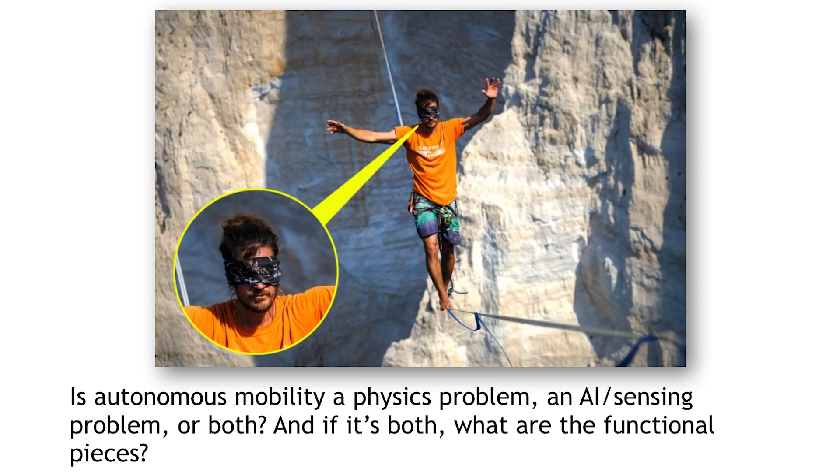Because of the complexity of the environment, if you're doing inverse kinematic style design, you have to have very complete world knowledge in order to do successful controls on the machine. If you think about this system, though, this gentleman has wisely decided it would be good to blindfold himself before slacklining across this canyon, and has taken the interesting step of removing sensing from the equation other than proprioception. So clearly, you can do very complex locomotion tasks like this without having a perfect map of the world, because you can blindfold yourself and intentionally delete the information. So that kind of asks the question, are high-level cognition and mobility separate problems?

And as any good talk has, there's no actual answer here, but I want to talk through some of the issues. You can imagine on the left-hand case that there is a robotic design approach that's a bit like this problem, where you have a really good mobility platform and you graft a really smart AI on top of it. And to some extent, they're separable. So the horse can operate by itself, but without an understanding of high-level intent. Certainly the AI in this case can think things by itself without having the mobility platform to execute them.

On the other hand, if you have a world-class athlete like Edwin Moses, who won a number of track and field meets back in the early 80s, back to back to back, that's not really a separate problem. So you can't imagine a case where an Olympic-class hurdler is really able to remove the cognition and planning from the mobility of the manipulation side. And there obviously is a spectrum here. So you can have machines that are more on the pick-and-place end that have very little in the way of active AI, or systems that are purely AI-based.

Our interest in this, and this is Pittsburgh. Pittsburgh has some of the same problems that Boston does, but with hills. So if you have aging infrastructure, or the very cleverly designed ADA-compliant front stoop here, this was actually co-founder Jonathan Hurst's house in Pittsburgh. If you imagine trying to have a robot that can move through the human world, it unfortunately contains things like this. It's hard to argue this was even really designed for people, much less for machines. But there's lots of things out there like this.

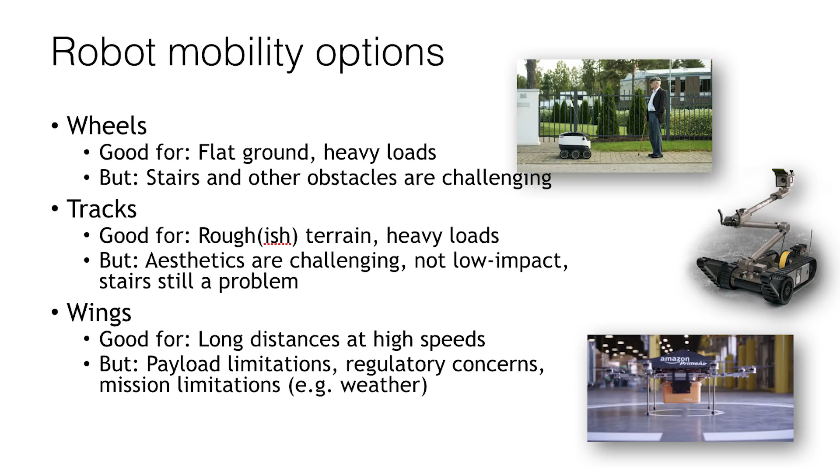So with wheels, stairs and obstacles are challenging. Tracks have a very military aesthetic in addition to some mobility issues. And then for wings, in Southern California, it might be possible to use those most of the year, but certainly not anywhere in the Northeast if you're taking into consideration weather. In terms of legs, legs in general are very good for human environments. As a consequence of us having legs as much as anything else, I'm sure if we had evolved with wheels, our environments would be good for wheels too.

So people have asked us, well, why bipeds? And the answer is, well, there's obviously a spectrum here too of the number of legs that you can have. So RHex, which is a fairly well-known early legged machine, had 6 legs, had the nice feature of being statically stable.

All things being equal, and they're obviously not here because the SCHAFT robot at the bottom and RHex have very different styles of legs, but all things being equal, if you have legs of sort of equivalent complexity, more limbs means more actuators, which means more cost. 2 legs in particular are good for human scale tasks in human environments. And that's as much a form factor thing as it is anything else.

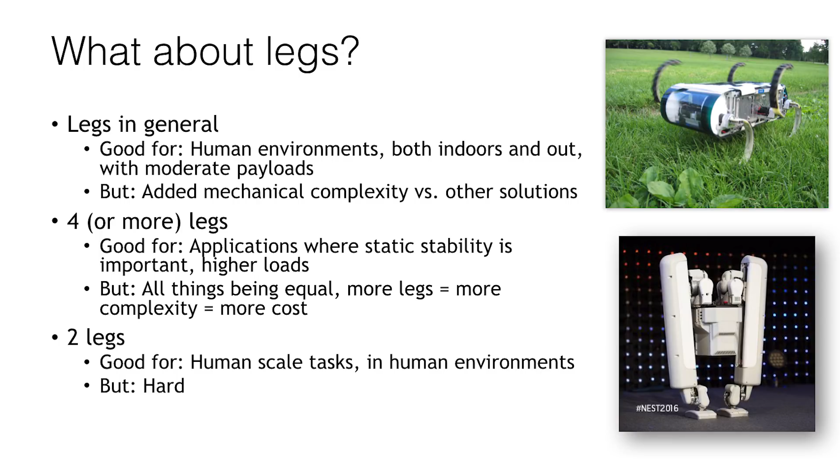I have a dog. Robots like Spot Mini have amazing mobility, just like dogs have amazing mobility. There are probably lots of applications where that's a reasonable choice. Where it starts to fall apart a little bit is in a paradigm where you're interacting with people. So if you imagine a package delivery task at a business where the expectation is the package ends up on the counter, you end up having to add additional manipulators onto the back of it, so the arm that Spot Mini has on it, for instance, in order to reach the counter, whereas with a biped form factor, you end up with the manipulators at approximately hip height for a human.

Now, the problem here is this is hard. So bipeds have been sort of what people have imagined the quintessential mobile robots being, going back to the 1930s with the Westinghouse robots. But there are some significant challenges here. This was actually the first robot that Jonathan ever built, on the left. This was an unnamed CMU biped from the 90s, back when he was an undergrad. And this has been sort of a traditionalist approach to making humanoids that actually is continued in commercial products today. So I'm not trying to point fingers and say, look, this is a terrible way of doing it.

The idea that you would directly actuate each joint in the robot is kind of an intuitively relevant approach. So the idea here is if you look at people, you can identify all the degrees of freedom on someone's arm, all on the leg, put motors in each spot, and then control it. If you had a magic actuator, that would work fine. The problem when you start to address the physics of this is that as you place mass distally, either on your arms or your legs, you end up with these big pieces of inertia that are out there waving around along with the limbs. And if you're trying to do low-cost educational robotics that's not particularly dynamic and is instead trying to give you active control over all of the degrees of freedom of the robot, from a control standpoint, fully actuated as opposed to under-actuated or over-actuated, then that's an appropriate choice.

The problem is, as you start to get up into dynamics, it would be a lot like having the car engine out there spinning around with the wheel of your car. It's a huge waste of inertia. You have to accelerate it and decelerate it as you do the movement. So there was some work that was done with someone who ended up actually being a collaborator of Jonathan's at one point. So this was Hartmut Geyer's work at CMU.

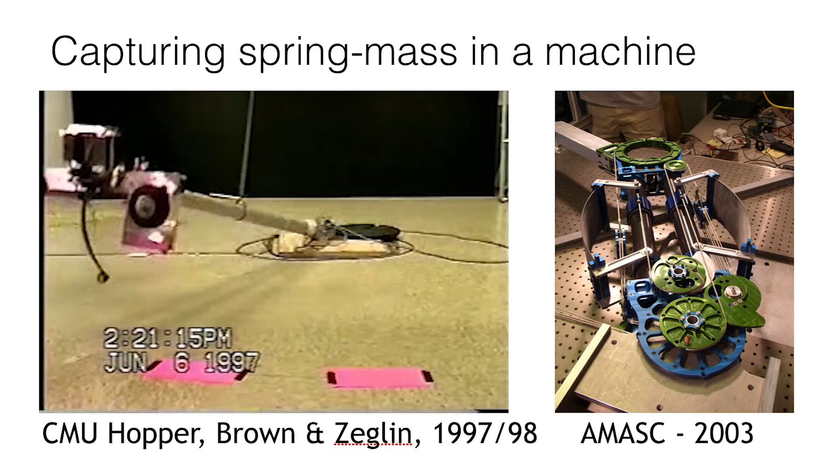So lots of people over the years have tried to capture spring mass motion in a machine. So this was work that Ben Brown and Garth Zeglin did at Carnegie Mellon in the 90s. The work that Ben Brown and Garth Zeglin did was the CMU bow leg hopper. Videos of that are available on YouTube.

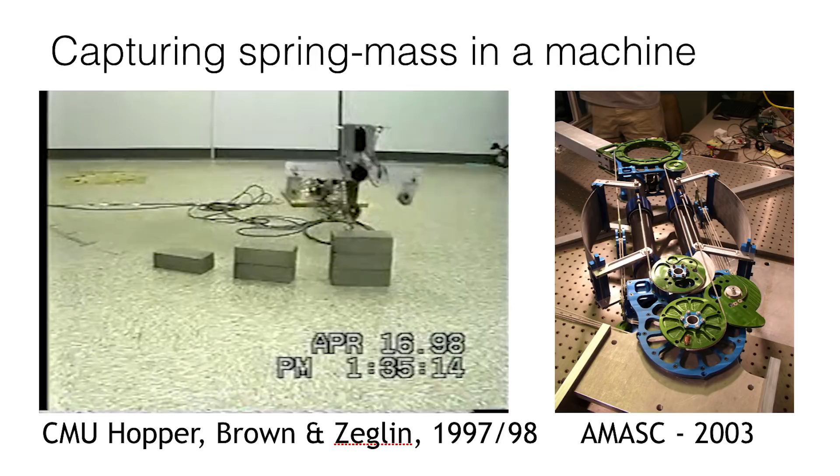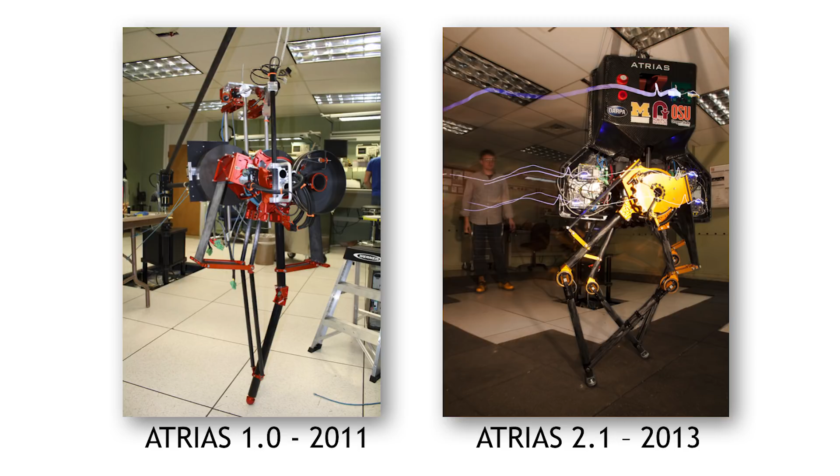That evolved into ATRIAS 1.0, and this was work that was done at Oregon State University. That was up to ATRIAS 2.1 by 2013. There were 3 copies of this, one at Oregon State, one at University of Michigan, and one at Carnegie Mellon. So that was Jesse Grizzle at University of Michigan and Hartmut Geyer at CMU.

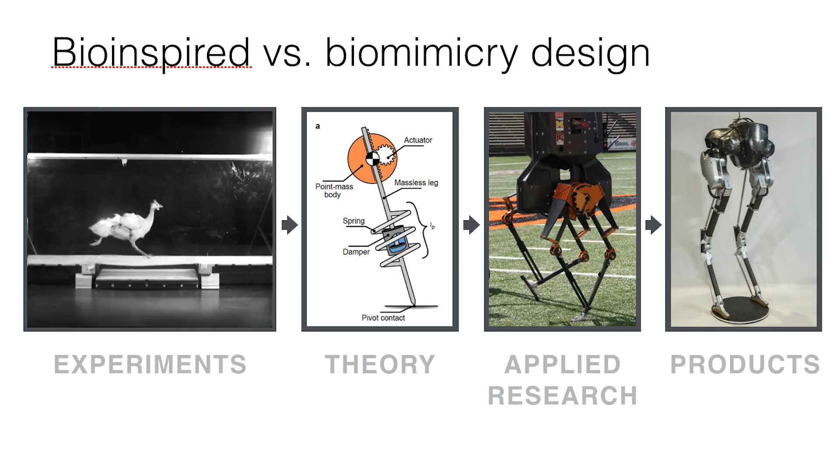Now, this gets into the topic that I alluded to, which is, are we intentionally trying to make machines that look like the animals? In this case, no. So the starting point here is, of course, animal experiments, because that's our best reference for bipedal locomotion. That goes into a math model, which turns into an engineering project, in this case, the ATRIAS project, and then is turned further into a commercial product, which is Cassie.

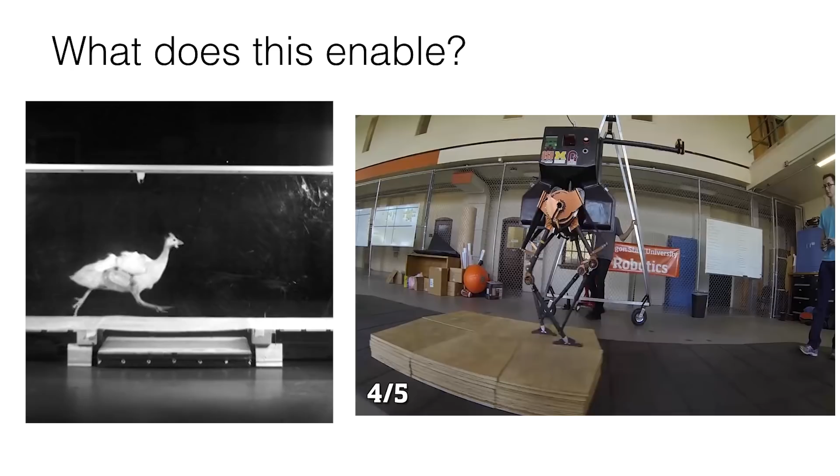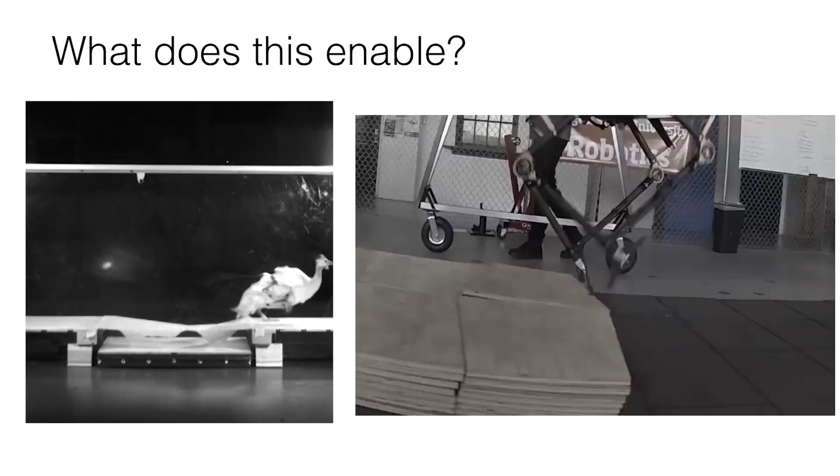So this enables a couple of things. If you compare these two videos side by side, the bird on the left-hand side has no idea that it's running down a runway and is about to hit a piece of tissue paper. So it was trained to run down a runway while being chased by a grad student. And what it's doing here is punching through the tissue paper.

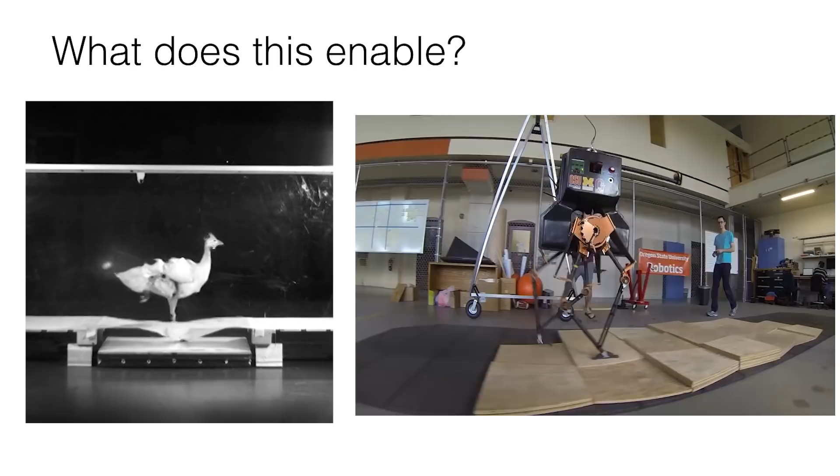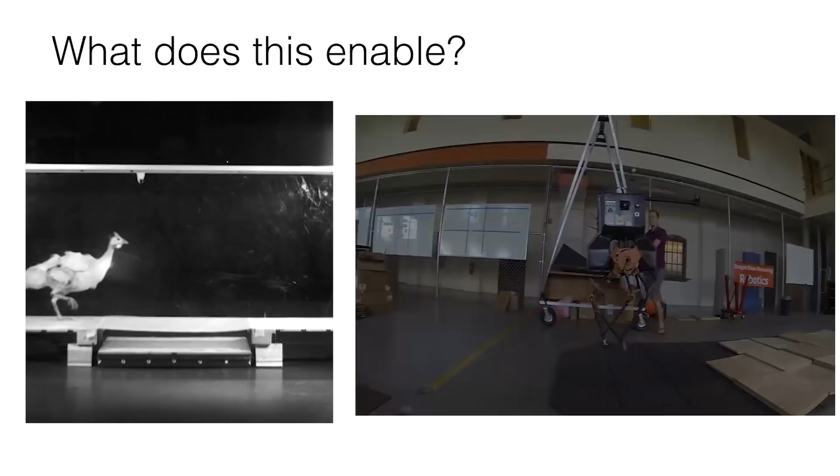And if you actually look at the neural response time in biology, there is no active control that's fast enough to catch that leg behavior. So what's going on here is primarily a physics problem that's kind of baked into the hardware of the robot on the right-hand side, or the bird on the left-hand side. And ATRIAS exhibited very similar behavior.

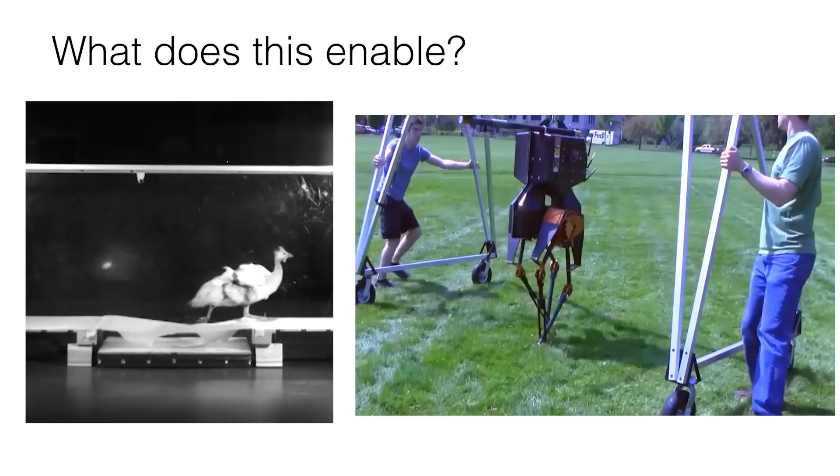So the version of ATRIAS here had no sensing on it at all. So it was unaware that it was walking, in this case, outside or on those steps, and was able to sort of stumble and recover based on the physics of the gait, as opposed to 3D scanning the environment, having a plan of where it was going to place its feet, and so on.

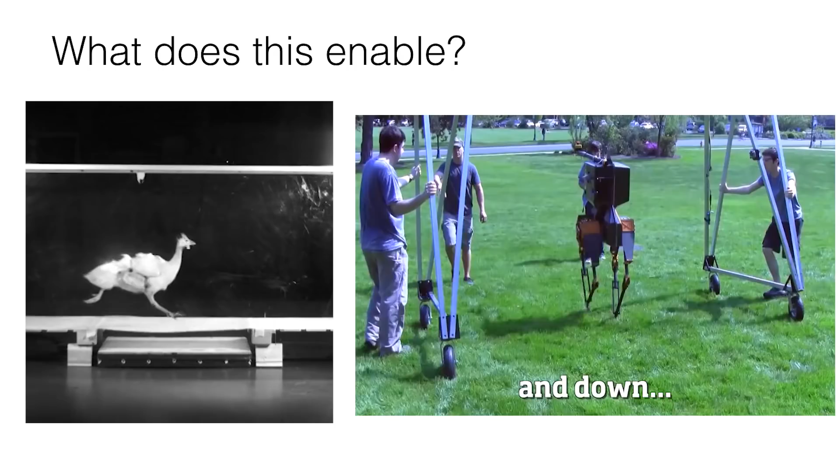And so that suggests that, qualitatively, because we can see similar behavior here between the bird and the robot, that maybe we're heading in the right track in terms of what portion of this is software defined and which portion of this is mechanically defined.

The problem here, though, if you think about this from a product standpoint, which is, of course, what we're interested in as a company, ATRIAS was pretty far from our product. So it had no ability to get up after a fall and would frequently tear itself to pieces when it fell sideways. So it had the actuators that came out the side, very heavy upper torso, took a lot of engineering work just to keep the machine alive, much less have it be a useful product.

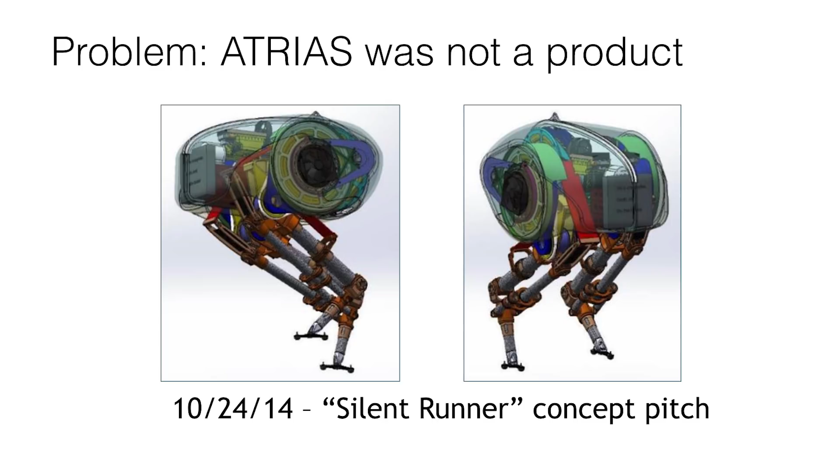So in 2014, this is sort of where I first got involved in the early stages of what became Agility. The university proposed a design concept for DARPA that they were calling at the time Silent Runner, and this is what evolved into Cassie in about a year and a half after the beginning of this project. So we got involved as a company formally in 2015. I spent the first year of the existence of the company working out the license agreement with the university.

We took an interesting approach with our seed investment, which was to negotiate a lot of it in 2015. But because it would have just spent money on legal fees and not building robots, we chose to defer all of that until November of 2016. So we moved at a pretty quick tempo after that point. The first robot sale was to the University of Michigan in 2016, started shipping them the following summer. And then closed our Series A here just a couple months ago with Playground Global as the lead.

We currently have a total of 14 employees. We have another 3 of them starting in the next 5 weeks. 12 of those are at the main office in Oregon, and then we're also opening an office in Pittsburgh in about a week and a half. We just signed a lease on that. Sort of conceptually, the split is that business development and software is in the Pittsburgh office, and electronics and mechanical stuff and robot construction is in the Oregon office.

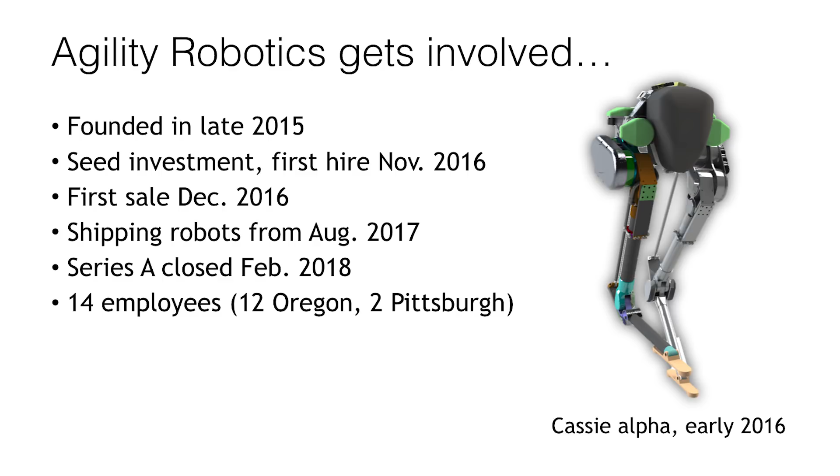I'm not going to talk a whole lot about our pitch, because that's not the point of this talk, other than to observe that platforms are products in and of themselves. So we are not, for instance, getting into package delivery by ourselves. We're saying that you can have a mobility platform that, when you add features and add infrastructure to it, becomes a delivery service. Or in the case of an automobile platform, you can take the same underlying technological platform and also have it be vehicle transport.

So a lot of people would look at these and consider this 2 independent markets. We say, well, from our standpoint, what we're choosing to focus on is the mobility problem, which is common to these 2 different end-use scenarios. A way to think about that with robotics applications is to compare iRobot and Starship.

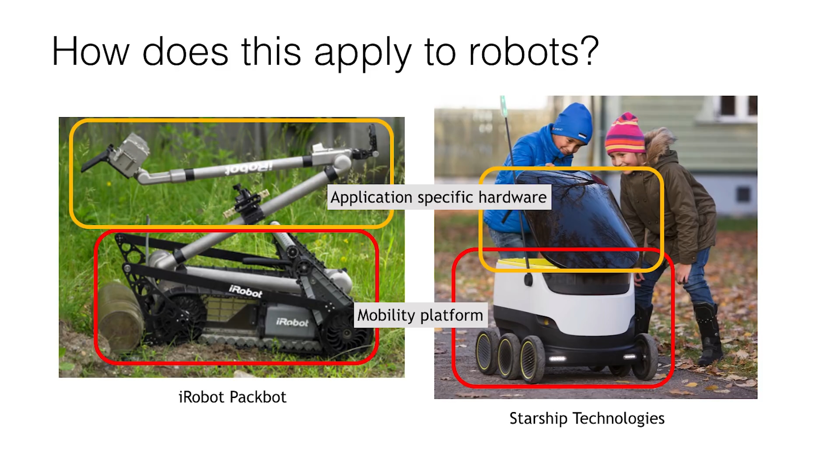And you can sort of imagine a case where you were delivering groceries to someone who didn't have a driveway. We go to the Outer Banks every year, and there's areas where you can rent houses that are only accessible by 4-wheel drive across sand. We don't have 4-wheel drive, so we don't do that. But you imagine that there might be a business model down there delivering groceries with a tracked vehicle so that you could access it across sand, or conversely doing IED disposal in a strictly urban environment where wheels, for some reason, are a superior platform. So we're trying to emphasize the separability of the application-specific design choices that are made and the mobility platform itself.

So we launched the robot in February of 2017. We allowed ourselves to be scooped by the university. We had intended to stay quiet about the existence of the company until that summer, but they were trying to do a president's address feature showing collaboration and launch of startup companies. As you imagine, there's not a huge number of robotics startups in rural Oregon. And so they decided to use us. Now, the nice thing with that is they have an extremely professional PR department and produced this video.

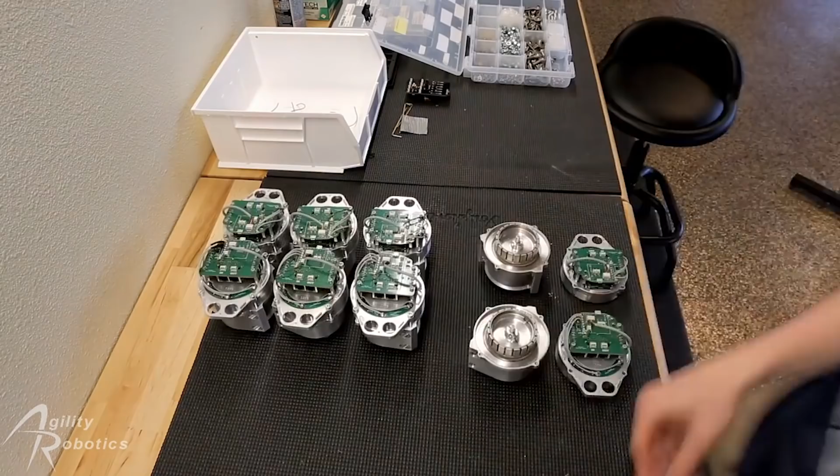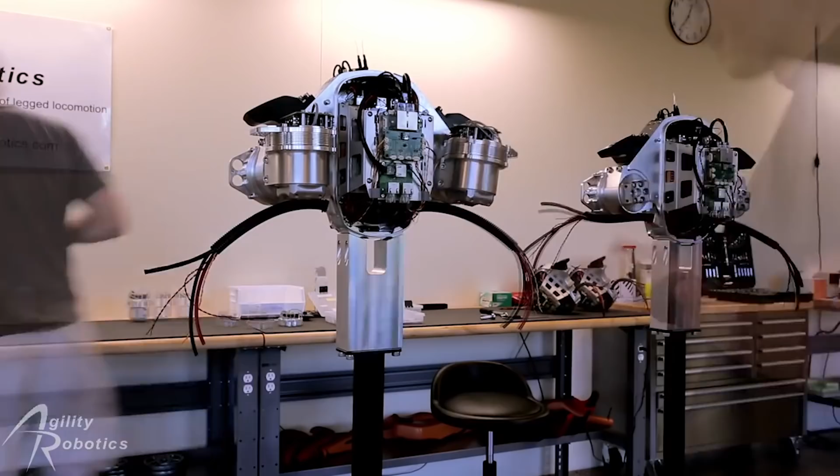And so Cassie V1 was assembled at the university, but all following Cassies that exist have been assembled at the company. All of the manufacturing is done in-house in Oregon. We do have a network of machinists that are local that we use. We had been stuffing the circuit boards ourselves. I encourage any startups to not stuff the circuit board yourself, just hire a contract manufacturer to do that. And then other things that we get outsourced.

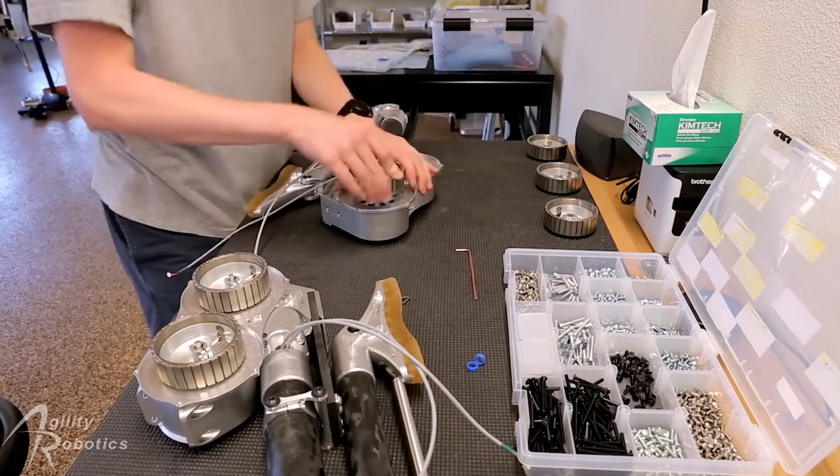And another thing I would encourage is if you're needing to build specialty batteries, and we had a very particular need for being able to pull current out of and put current back into the battery on very short timescales. That was initially designed by us, and then we started working with a contract battery house to optimize the design. But other than that, all of the assembly and testing is done in-house.

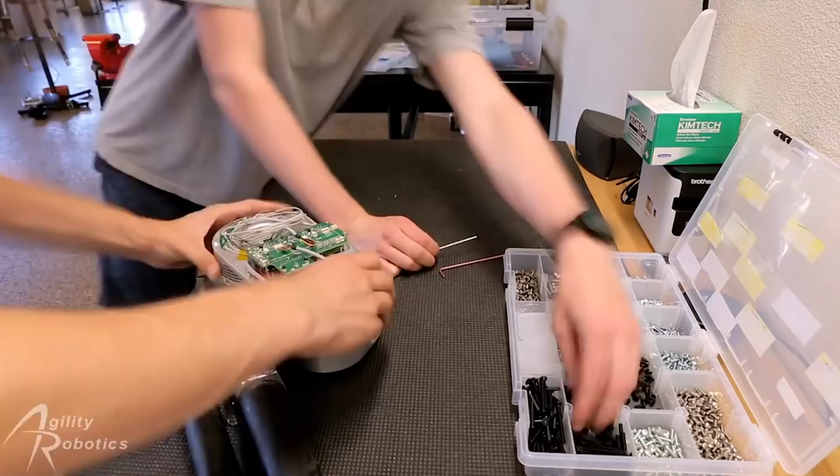Obviously, as we would scale, we would push this off to contract manufacturers first for sub-assemblies and later for finished robots. But at least for right now, it's been a huge benefit because it allows us to iterate pretty quickly.

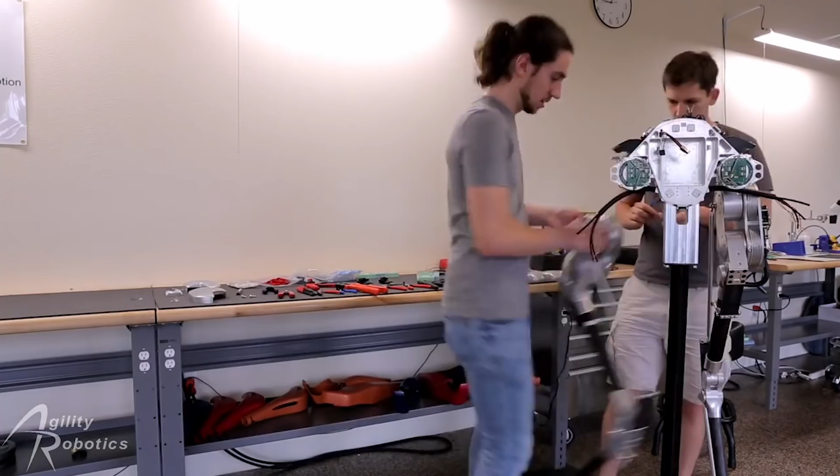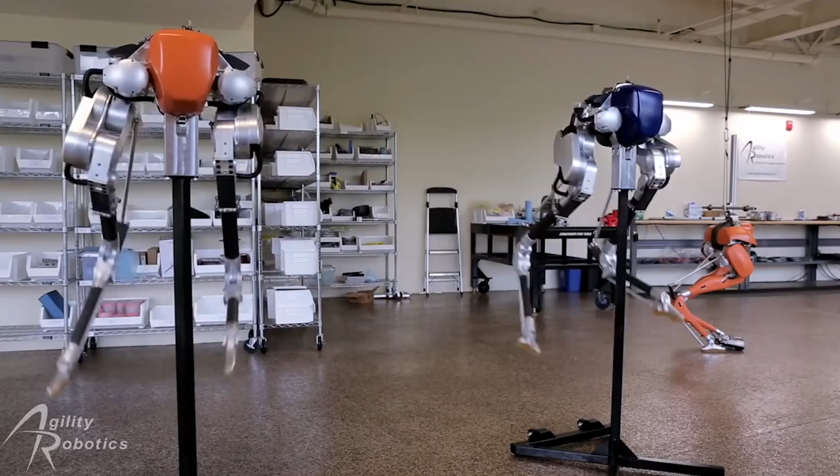We also adopted sort of a hiring practice where all the engineers that we bring in first have to work with our technicians to learn how the robots are built and sort of eat their own dog food. Because when an engineer designs something, they can, in some sense, wash their hands of the assembly process. And by forcing them to go through the support side of things and the construction side of things, it adds a lot, I think, to our workflow in terms of maturing the design.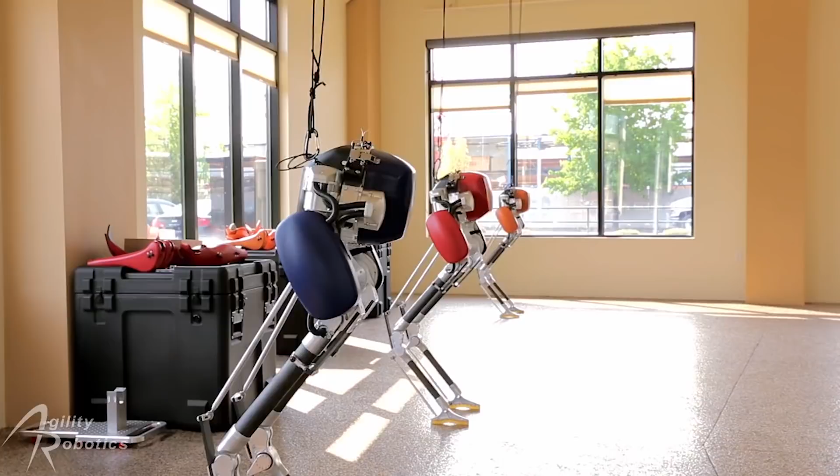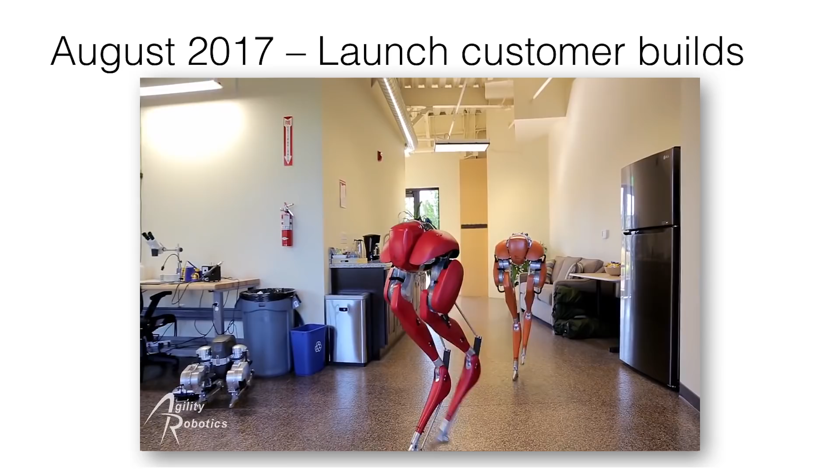So these were the first three robots. That was University of Michigan, Caltech, and Harvard. I can say their names now because they've all tweeted about it. We have another 3 robots actually that were just delivered. The first one of that batch was delivered last week, and the next 2 are coming up here. They have not announced it publicly yet, but so there'll be a total of 6 customer robots that have been delivered with the next production run starting shortly here.

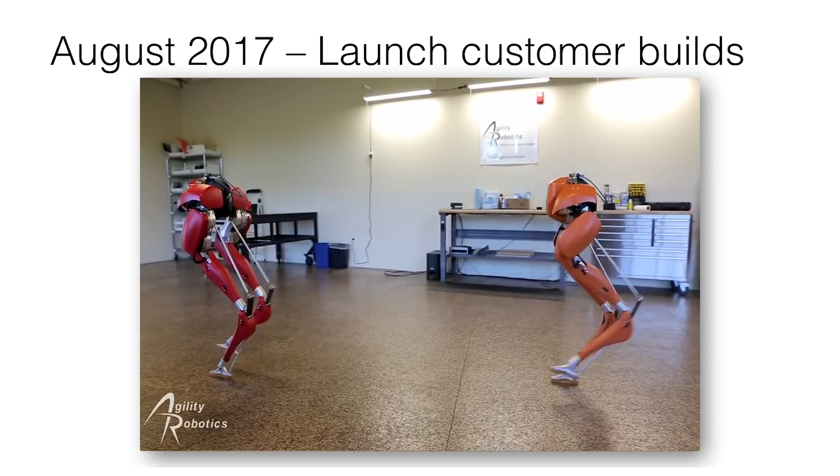So those were the launch customer builds. So that was Cassie version 2 on the far left, which was sort of the intermediate version transitioning away from the straight research platform, and then 3 of the first production runs of Cassies. So here's 2 of them wandering around our office.

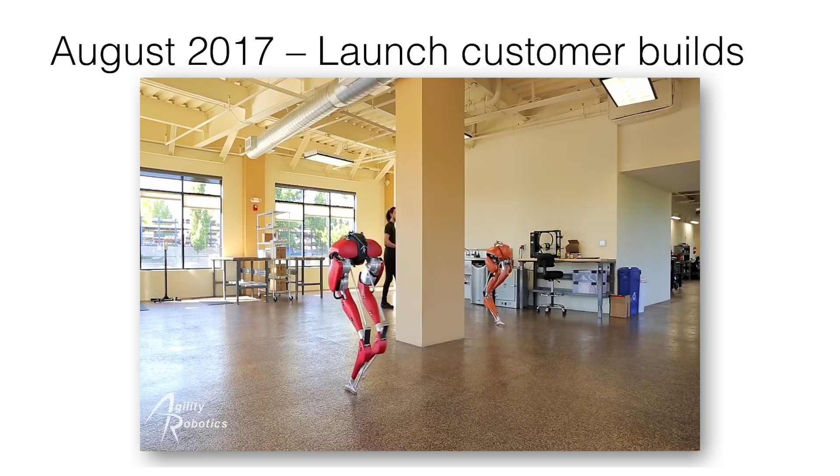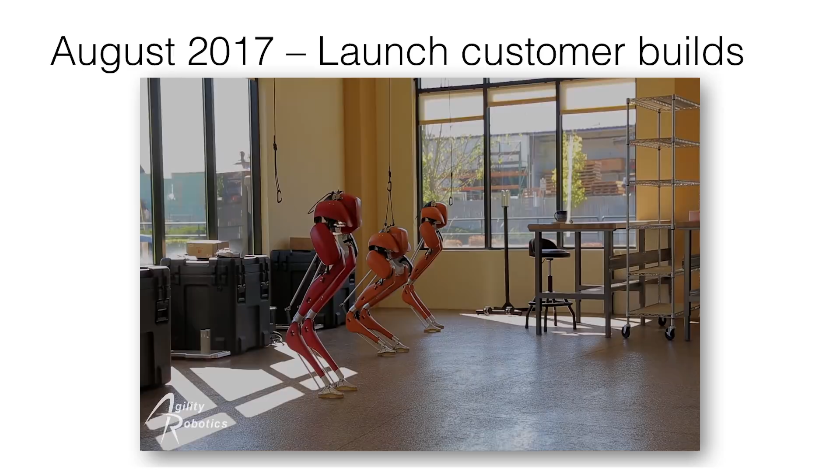People ask, is the robot right now autonomous? And I'll get back to what that means, because it's actually a more complicated question than you might guess. Right now they're teleoperated, but they are teleoperated with intent rather than with marionette puppeteering kind of things. So in that sense, what I mean is, although you'll see in some of the videos some of the remote control units standing behind the robot, they are sending abstract commands to it: walk forwards, turn left, turn right, squat down, stand up, not sending commands that are directly applied by the robot to the motors.

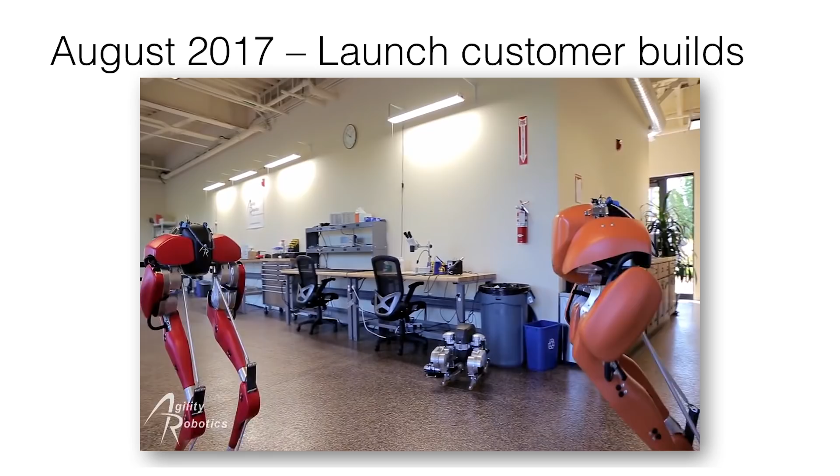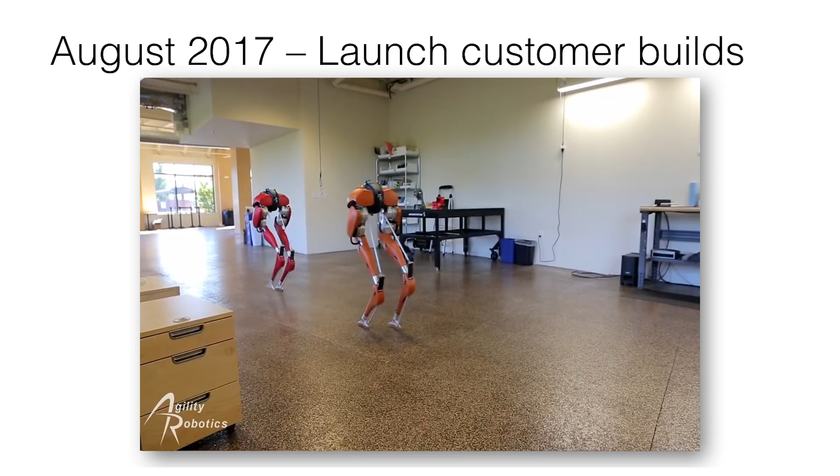So differentiating, say, between a radio controlled car where you're directly controlling the current that's going to the motors on the wheels versus you can imagine that the link here is simply projecting a little command to the robot or whispering in its ear saying it's time to walk forwards. And that is a lot more amenable to the AI stuff that I'll talk about in a second.

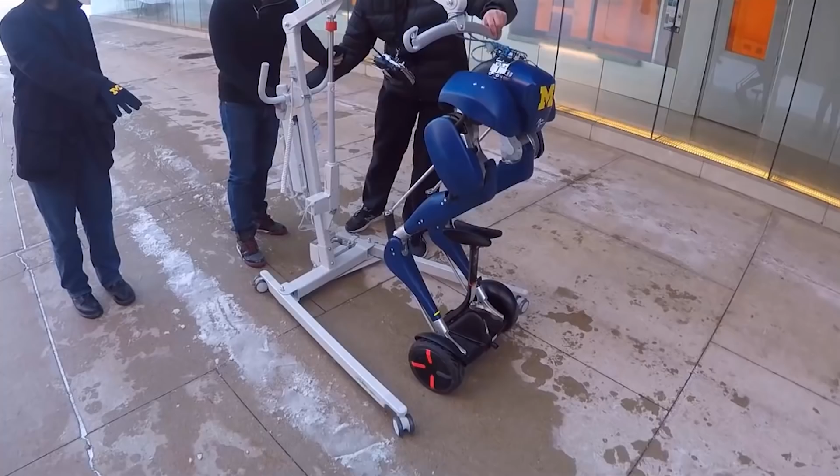So the Michigan acceptance testing and delivery was last August. That was the first time that we had one of these out in a group that wasn't us. And Michigan, if you follow their YouTube channel, has been quite enthusiastic with trying interesting ideas with their robot, including this, which really surprised us. What's interesting about this is that nothing about our design was designed to allow the robot to ride a Segway.

It's simply that the robot can balance and it understands how to lean forward and lean back and maintain its center of gravity. So in this case, because riding a Segway is just about standing and then shifting your weight, center of pressure on your feet forwards and backwards, they were able to get it to ride a Segway with very little modification.

More interestingly, I can imagine myself doing that because I've ridden a Segway once. This I'd be personally a little bit more skeptical about. But again, at its fundamental purpose it is simply a balancing operation where by keeping yourself posturally upright, you can solve the balancing problem in a way that is very similar to how a human does it.

So the most recent news from sort of a business development standpoint was that we wrapped up our Series A in March 2018. This is public information, so I'm not saying anything that's super secret here. The investors were Playground Global, which was Andy Rubin's fund that he started after leaving Google, Sony North America, and one of our seed investors, Robotics Hub from Pittsburgh.

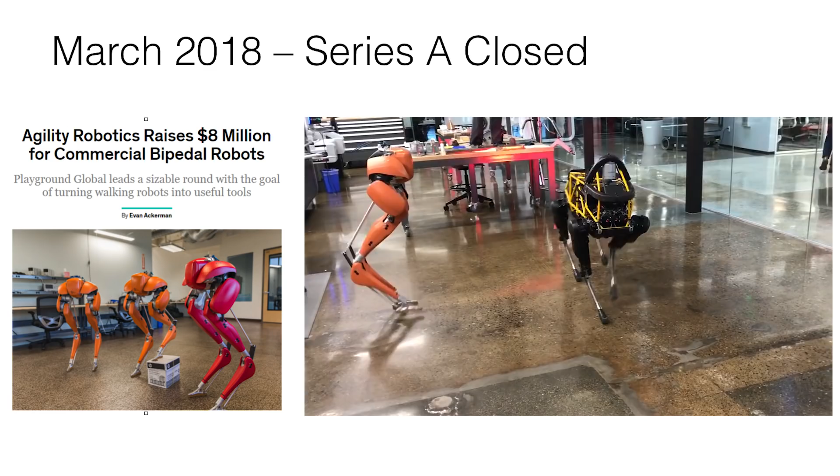While we were at Playground, Cassie got to meet Spot. This is, I think, an interesting side-by-side comparison between quadrupeds and bipeds. But they had fun together.

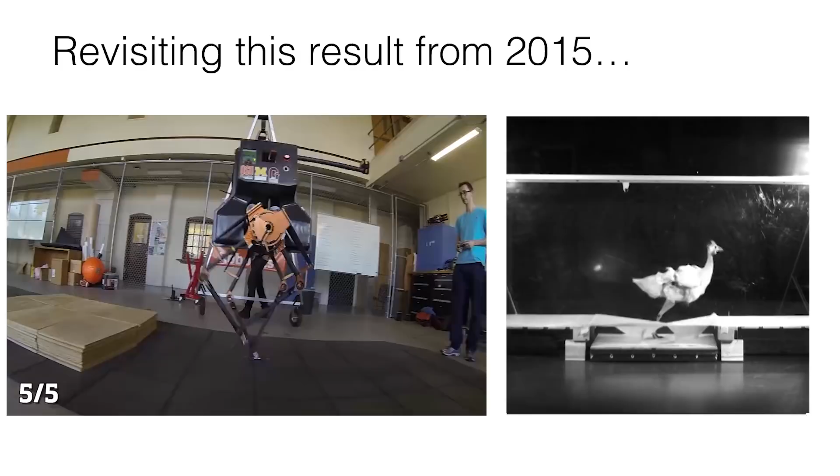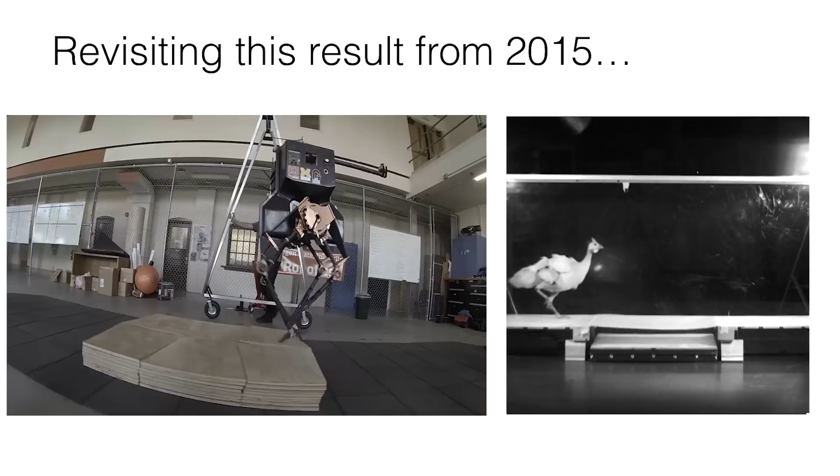All right, so revisiting this result. So we got here with ATRIAS in 2015. One of the interesting side effects of the ATRIAS leg design was it removed a lot of the mathematical complexity. So with the 4-bar linkage, it canceled out this elbow and this elbow. So it allowed you to actuate directly along the axis of the leg, which is a lot closer to the SLIP model of actuation.

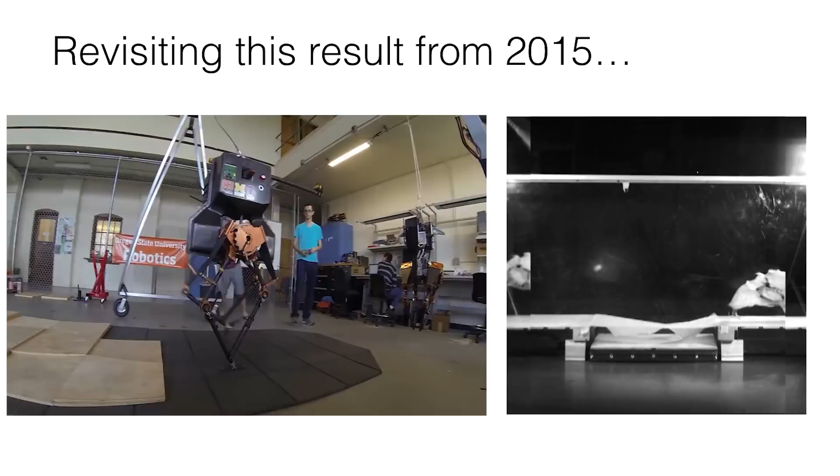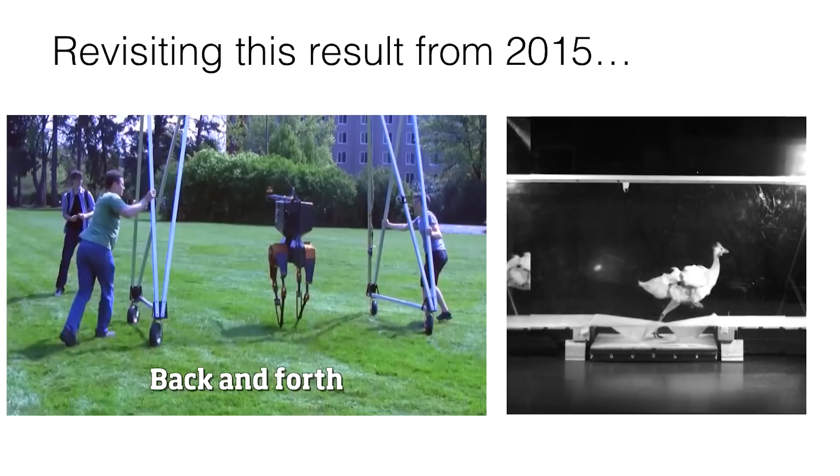And that ended up being a lot harder with Cassie, I think, than we expected that it would be. Cassie has a knee, so when you pull in one direction, there are components of the resulting vector at the toe that end up going in a direction that's not along the leg length direction. And I don't want to say we stumbled on that for a while, but for about the last year, that was a source of a lot of added complexity.

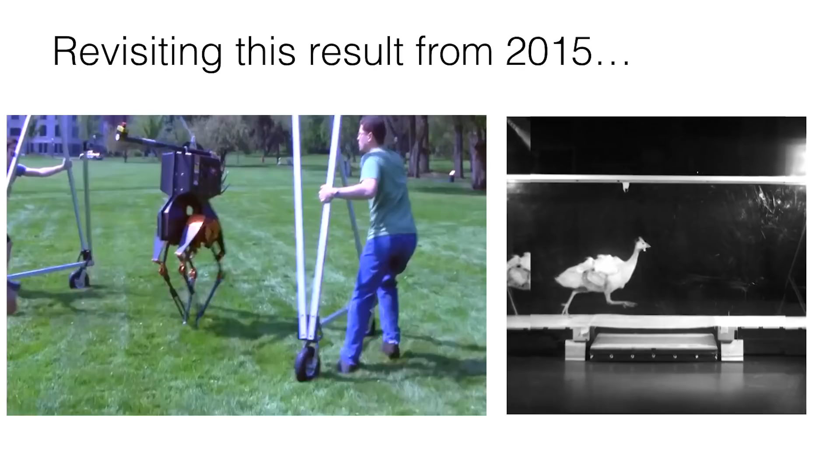So Mikhail, our lead controls engineer, started a project about a year ago taking apart the original controller design and rebuilding it from scratch. And I'm pleased to be able to show you today, we have not posted these videos yet, that it has paid off. So this is Cassie walking at speed, blind over steps.

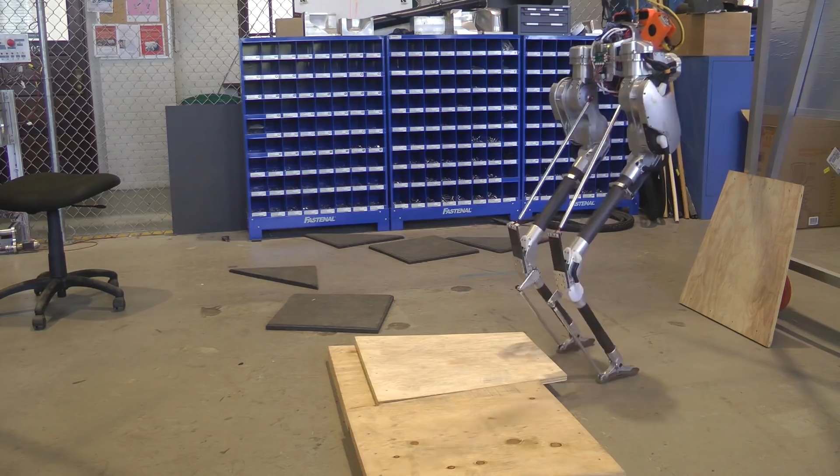So again, we're not to the point yet of being able to graft a whole lot of world perception on top of this, and I'll explain why that's necessary on the next slide. But this does show that by not having to stop and think deeply about where you're placing your feet, you can maintain the motion. Also, because the robot simply perceives this as kind of a postural problem rather than a controls problem per se, you can see once we get to the next part of the video, that it's able to treat this as a sidestepping behavior in addition to a forwards-backwards behavior. So the same control algorithm that works walking forwards also works from a sidestepping standpoint.

And we think this is the first time that a biped has walked at speed over steps. It's a claim that I would want to research before I firmly stick a stake in the ground. But so that's an interesting result, and that was actually just from last week.

All right, so what about autonomy? That's great if you're indoors in a relatively controlled environment. Where this breaks down, interestingly, and there's some work with gait research from humans, is that we plan about 2 or 3 steps ahead, not much farther than that, and that the behavior in a lot of applications is actually dominated by the clockwork physics behavior of your legs up to a point. So in other words, if I'm trying to climb steps, I can approach the staircase, set my gait frequency, and then proceed up the steps without thinking about it a huge amount.

Where that goes wrong is something that I'm sure everybody here has experienced, which is you're going down a flight of steps, usually carrying something so that you can't see the bottom, and you step down, there's the last extra step where you break your kneecap. And that's illustrating the disconnect between sort of a clockwork physics-based approach and a more robust approach that includes some planning knowledge. So just to illustrate that with Cassie, and this is using our simulator, things go well and then not so great. And so this is why you need planning.

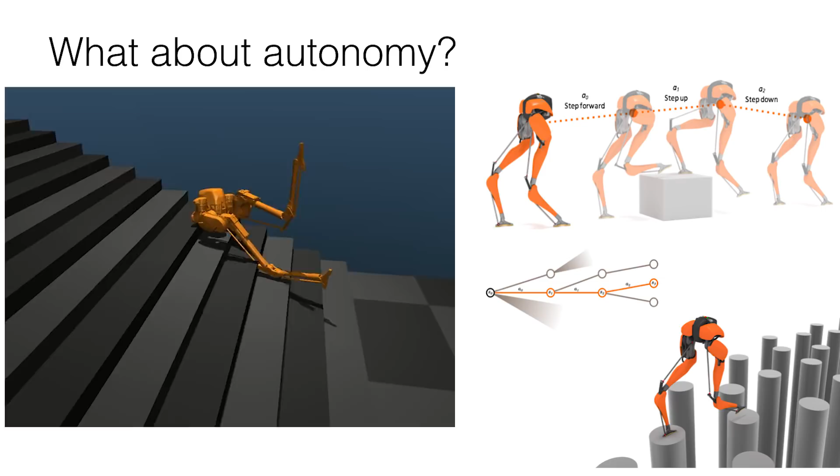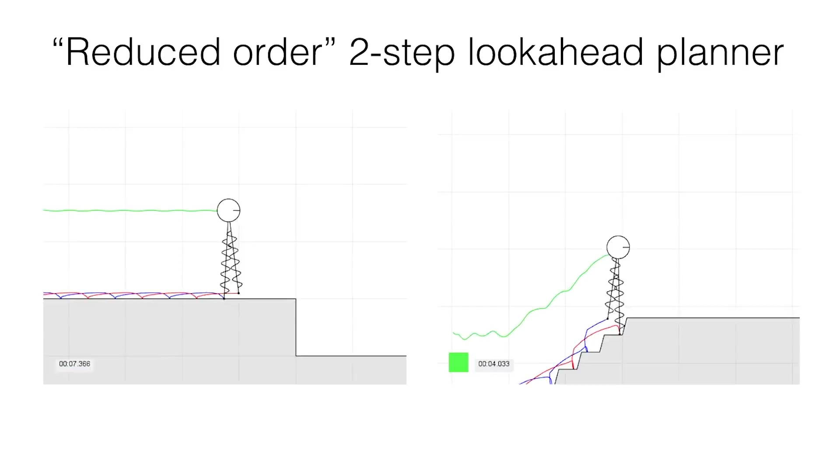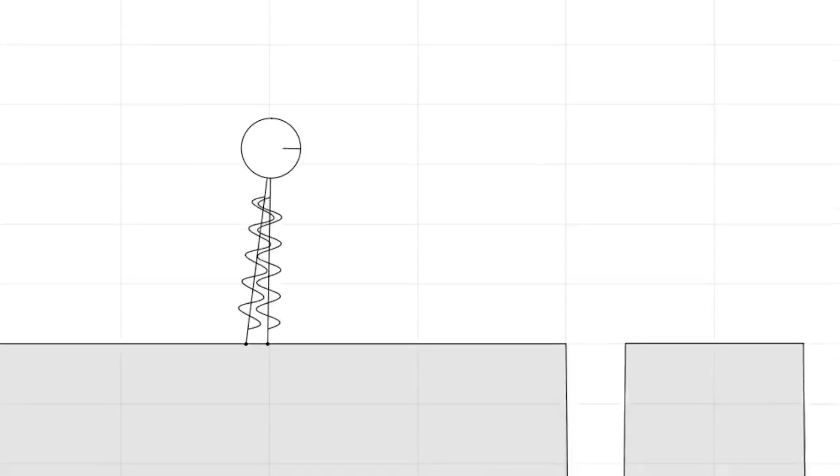For people who are interested in some of the technical background, this is actually a Monte Carlo search. So again, because we have this stable of behaviors we can pull from, the space that we're trying to plan through is significantly more constrained than all of physics. Because if we had to include the option to leap up into the sky like Superman, or maybe we crouch down and walk like a duck, that's a hard problem to plan through. But the available options that the robot ends up considering is actually relatively small.

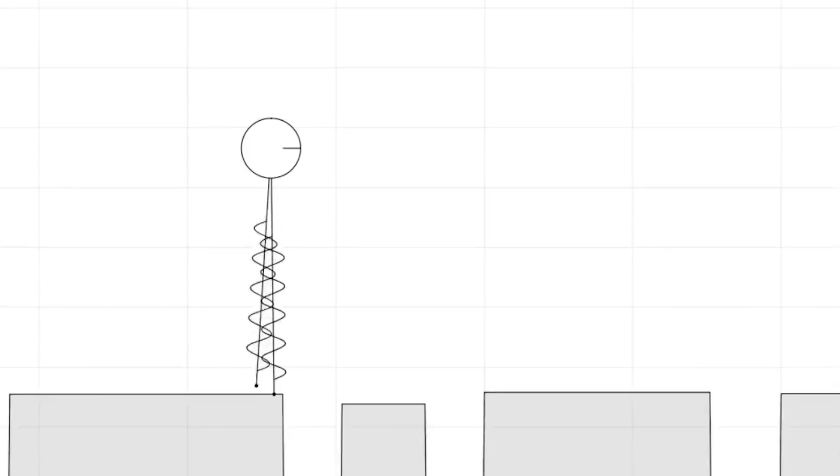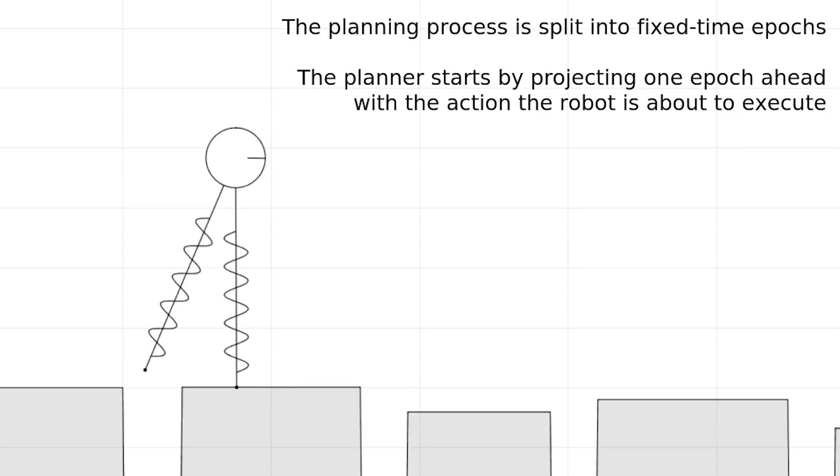So you'll see here, it tries a bunch of options, falls on some of them, and keeps walking on others. And it just picks the one that allows it to keep going the longest, and then the planner updates the next step. So this is obviously kind of a toy approach here. Again, this is a very simplified controls model, but because the robot is designed to encapsulate this physics, it does extend pretty well. So the next part of this video shows the planner running in full 3D using the same model that we actually use for controls development.

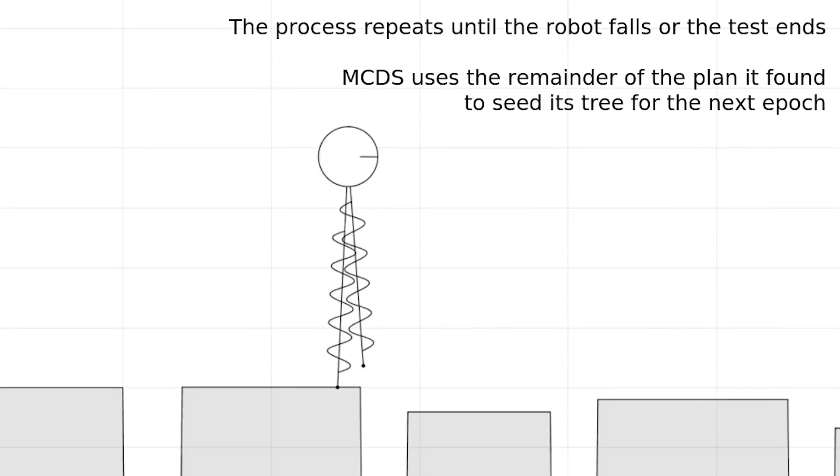So although this looks a lot like some of the physical videos that we have that have been radio controlled, this is actually operating fully autonomously. So it's using the real control system on the robot, and the only thing that's simulated here that is not physically implemented on the robot is knowledge of the world space. But you can imagine this sort of problem being a relatively simple machine vision problem. You could solve it either with LiDAR or with real-time stereo. And the actual planner, in this case, is being forced to run hard real-time along with the control system.

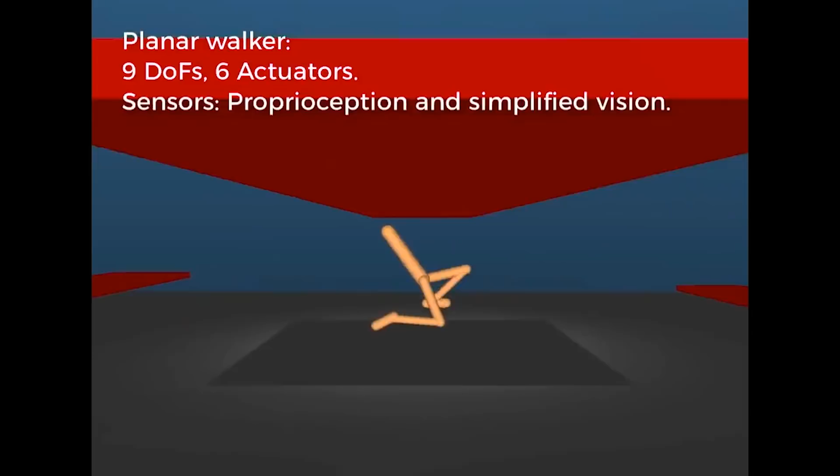OK, so what about deep learning? I'm sure most of you are familiar with this video. This was from Google DeepMind's grafting deep learning onto a biped. And earlier in the video, there's a bunch of pretty humorous clips that I did not include because I'm not trying to make fun of their results. And this was showing that with a physics system, there are learning approaches that result in something that's a bit like what you would expect from a bipedal system.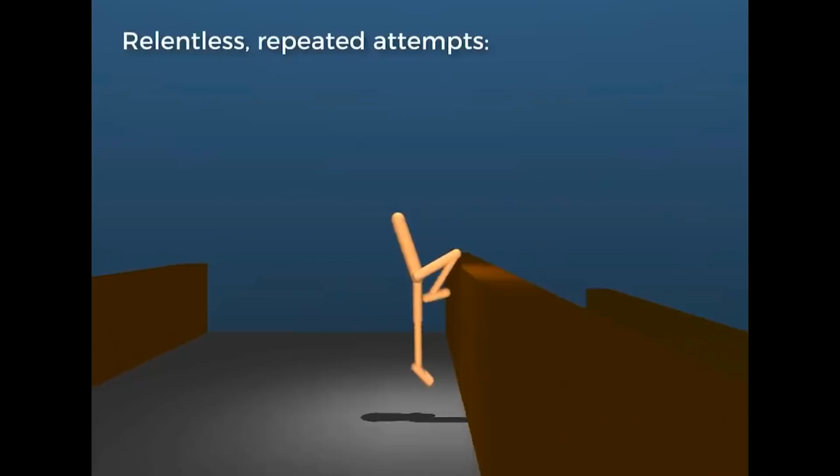And we're taking very early steps with that. And this is work that was done at Oregon State and then also a collaboration with UBC. This is also a video that was actually just released yesterday at Dynamic Walking in Florida. So the idea here is to say, like, look, we have this physics-based approach for Cassie. What do we do as the next step? How do we graft higher level learned behaviors on top of that? So the reference motion on the left there was derived from the physics controller. This controller that's shown here is actually entirely learned behavior.

So can we get to a point where there is a higher level AI mind on the robot that understands enough of the physics to allow it to move? Now, the real world, and I'll talk about this on the next slide, is probably a combination of the two, and there's good evidence that people behave this way. So a lot of your behavior at the quote-unquote unconscious level is either strictly physics-based, based on the geometry and physics of your legs, or extremely low-level neural stuff, so spinal cord and down in terms of the reaction. And so there's not an either-or situation. You might need both deep learning and the physics-based controllers, which leads to this.

So we like to think of there being 3 levels of controls and then the 4th level being physics in terms of things that define the behavior of the machine. So if you think of layer 0 being the physical hardware, layer 1 is the really fast control loops. So from a controls engineer perspective, these are the things that are going at 2 kilohertz, super fast, tight control loops. At layer 2 is learned motor strategies.

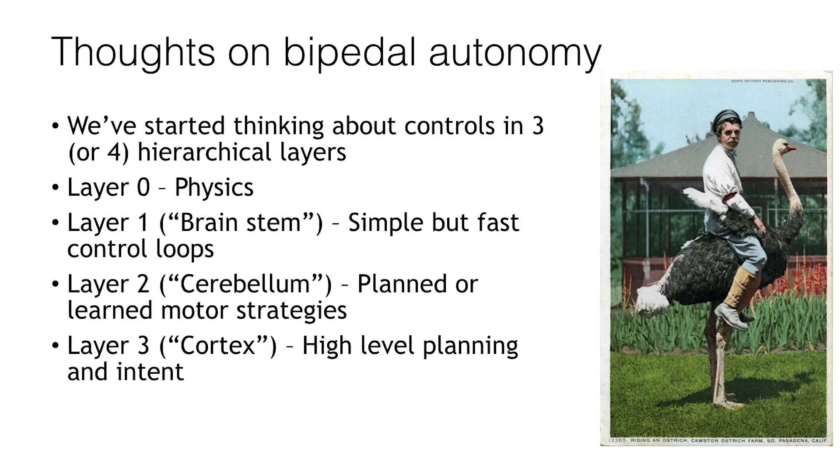So that's, I know that I need to adjust my gait frequency slightly on steps or I'm going to fall down. And then high level planning is I need to go up the steps. So understanding intent and mission goals. How you might map this onto automobiles, and the analogy is imperfect, but it's useful to think about, are that the physics of the car occurs at the design level. So that's how does the engine work? How do your cylinders all get fuel?

Fuel injection is, all right, I know how to feed fuel to the engine. How much do I give it? So that's a really tight control loop that monitors the oxygen sensor in your tailpipe. Layer 2 is the car is in a slide. How do I chatter the brake system so that the car straightens back out for anti-lock brakes? And then layer 3 is self-driving.

And what's interesting with this is that the self-driving revolution arguably requires all of the above layers to exist. So if you had an old school Model T, making that a self-driving car would be a hard problem because you can't just abstract the AI away from the control system. And we're trying to think of this as sort of a similar issue then, where right now we're selling to controls theorists who are mostly interested in this layer 0, having a robot that's mechanically able to walk.

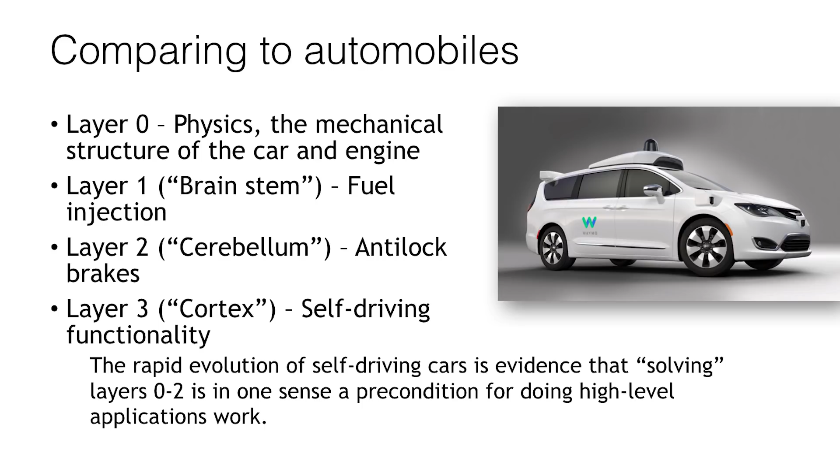By the time we're up to the next product launch that we're looking ahead to next year, we hope to be able to sell to people who are starting to take applications engineering goals in mind, so AI developers. In other words, ignoring all the things that are required to sort of posturally keep the robot upright, and they're worried about control from the standpoint that starts to look a little bit more like using this as a mobility platform and less as a cool bipedal robot.

And we expect that most customers actually want to use the robot here, not at those lower levels, where you can simply imagine yelling things at the robot that you're riding on. Go forwards, and it knows enough to not fall over the curb, it knows enough not to walk into traffic, and so on. A lot like the analogy of this very dapper gentleman from the 20s riding his trusty steed. So in other words, we would like to be the ostrich, and we'd like to give you the pleasure of riding. Not literally, we're not offering Cassie rides yet.

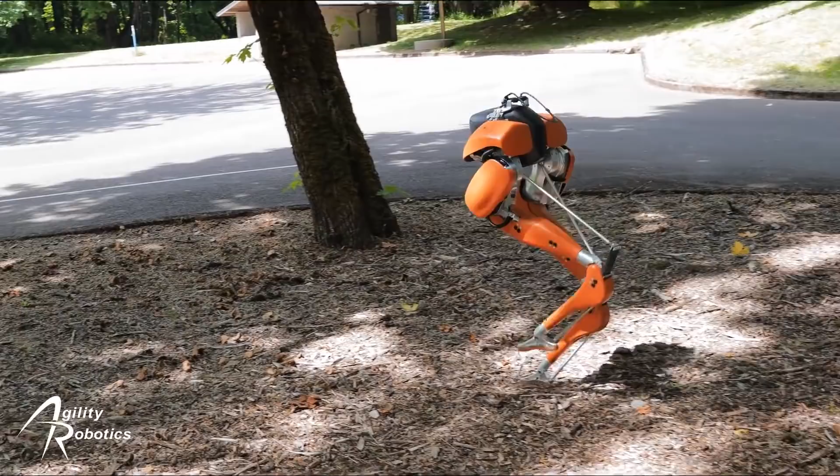And so, to show you a video of sort of where we're at, this also has not been released. So this is showing sort of what we can do outside now, crossing different terrains. This was about a 5.5-minute continuous walk, obviously edited down quite a bit. So all of the behavior here with the ground contact, showing the transitions across surfaces that have different stiffnesses, is all behavior that's simply baked into the robot. And this is heading in the direction of having the robot simply be an abstract platform that can be available to customers as opposed to requiring you to be a legged robotics expert.

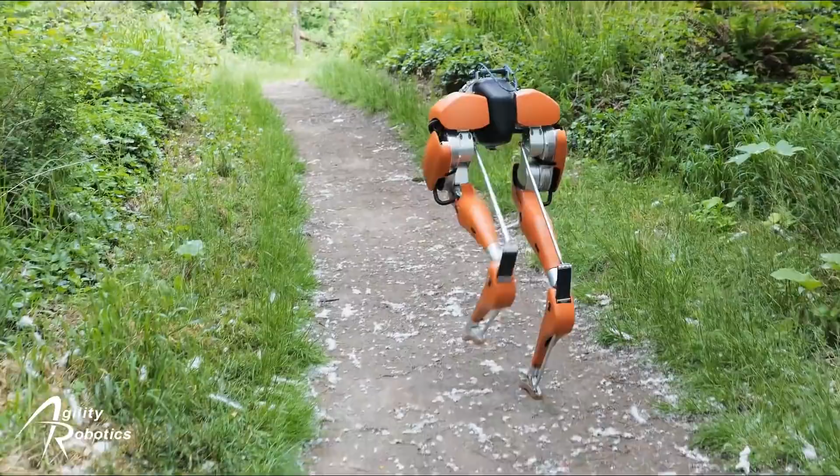So let's let this run for a second. There's a particular spot in this clip where it steps on a root growing across the path. Again, we're not 3D scanning the environment and planning for those sorts of disruptions. That's simply baked into the control system. So that'll be online. I'll let you watch the whole thing at your convenience.

Some hard problems with this. So e-stop with a legged platform is an interestingly undefined problem. What I mean by that is that with a car, if you imagine you're doing self-driving, e-stop is frequently max brake effort, let the anti-lock brakes and the vehicle stability control keep you going in a straight line, stop you as quickly as possible. It's not clear what slamming on the brakes means for this guy.

Certainly, you don't want to turn his power off. That's a problem both for the robot and for anybody who happens to be in front of it. And that's something we're looking at right now. Our best guess at this point, and I'd be interested if anybody has an interesting idea on this, is that e-stop for a legged platform means to reduce the joint torque limit significantly, such that you're basically coming to a stop.

And you look at this with people who are really good at taking falls, so mixed martial arts, karate people, that kind of thing, where you're sort of accepting the fall and then damping out the consequences as opposed to simply passing out and collapsing to the floor like I would do.

And so we want to be careful here that there's two goals for the e-stop. First and most important is don't hurt the environment or people in it. And second is don't destroy the robot. And the e-stop process for legs is something that we're going to be actively working on for a while yet.

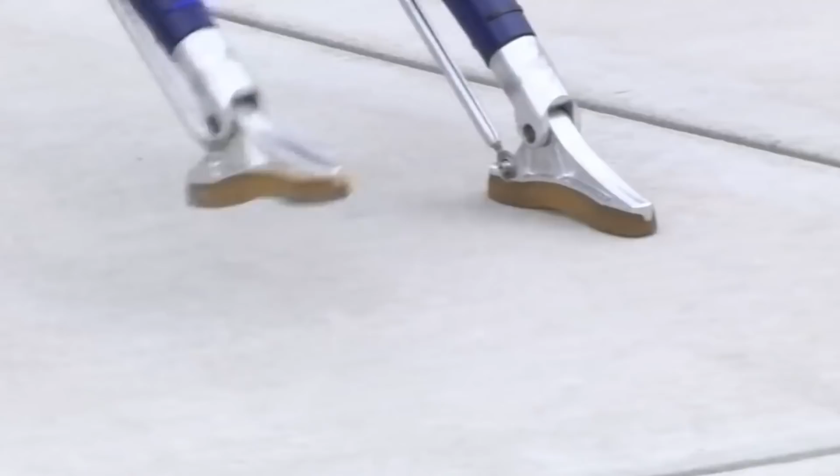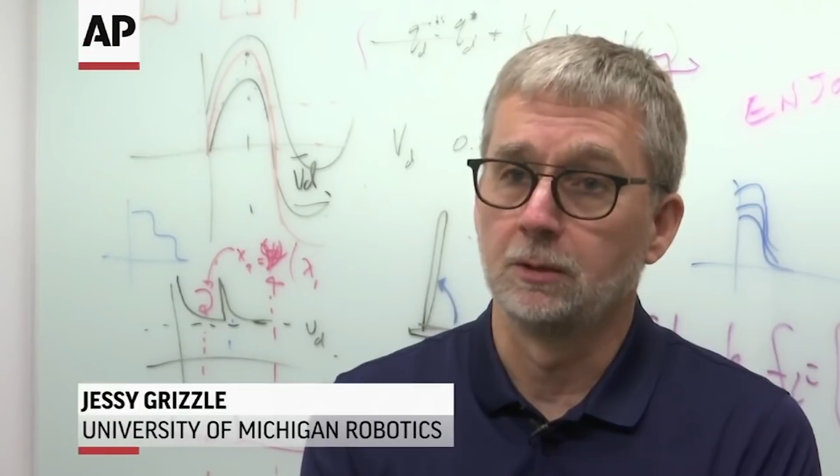And then the second problem is failing gracefully. I'll pick on Jessy just because he loves to post these sorts of videos. This was actually footage the Associated Press took. It's been good advertising for us because our primary design goal for Cassie was don't break when this happens. And fortunately, we've been quite good at this.

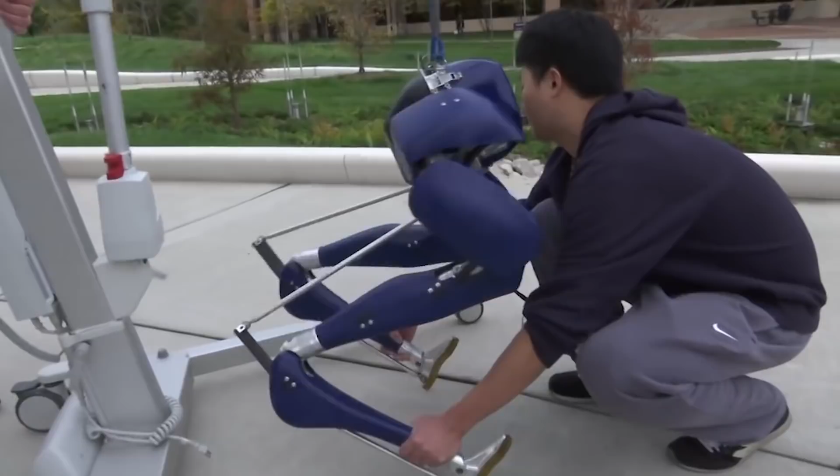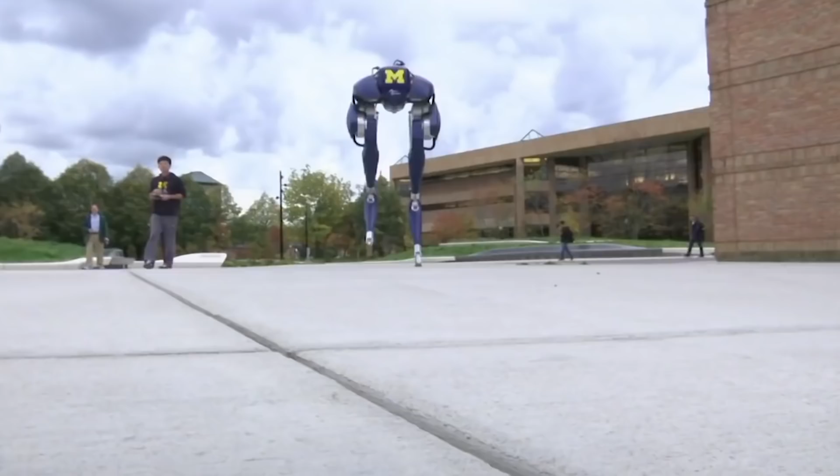So the question is, how do you recover from that? What would a person look like? Well, sometimes people don't recover from that, which is why emergency rooms do a good business in broken arms. But from a robustness factor on the robot, after this happens, we need to be able to get back up, survive the fall without damage. And as I said with the e-stop question, more importantly, don't hurt people in the environment or the robot, in that order.

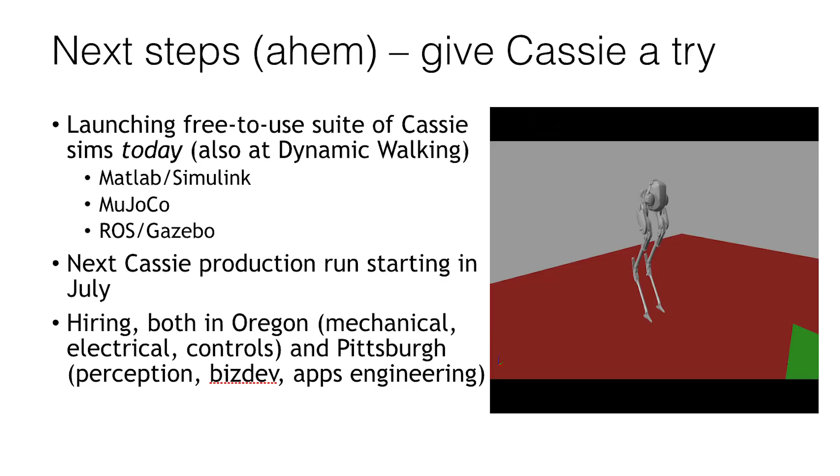So we're pleased to announce today that we're releasing our sims available for public use under a BSD license. The first of the two that we're releasing is actually available now. It's available from GitHub, and that's MuJoCo. And then the one that people are more familiar with is probably Gazebo. That's still under development. We're finishing that up. We'll be releasing it in July.

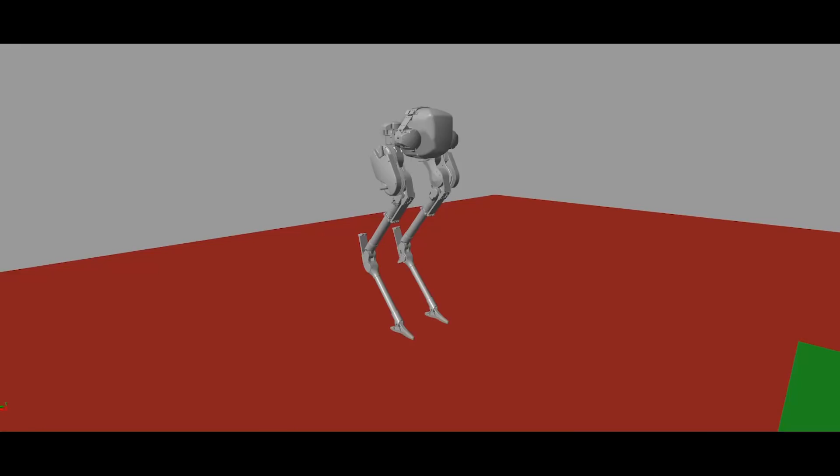So if you have controls ideas that you try, keeping in mind that at this point this is intended for people who want to control the robot at a lower level, those sims are really for that audience as opposed to people who are trying to graft higher level stuff onto it. But the video from UBC and Oregon State was done with the MuJoCo sim. So it's the same tool set that we use internally to develop for the robot. And one of those two tools is available now, with the next one coming out in July.

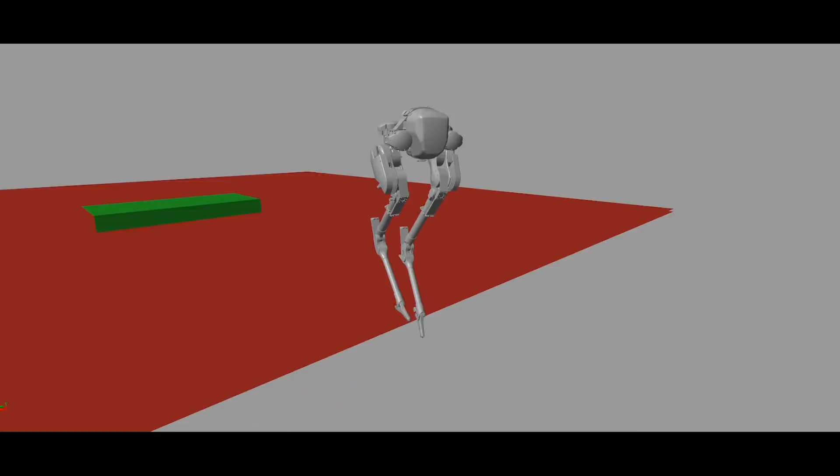We're also starting the next production run here shortly. We're taking a month to reset, do inventory, and do some remodeling out in Oregon, but shortly thereafter we're getting back into building robots. And then we're hiring both in Oregon and Pittsburgh. We're into the phase of growth of the company where I haven't met everybody that works for me, which is an interesting experience. But we're glad to be hiring, having a lot of fun with the company.

So hopefully that leaves a little bit of time for questions. We did have a great eclipse out in Oregon last year. Cassie enjoyed it. Fortunately, she didn't have eyes, so there wasn't any risk of her burning out her optical sensors. But thank you.